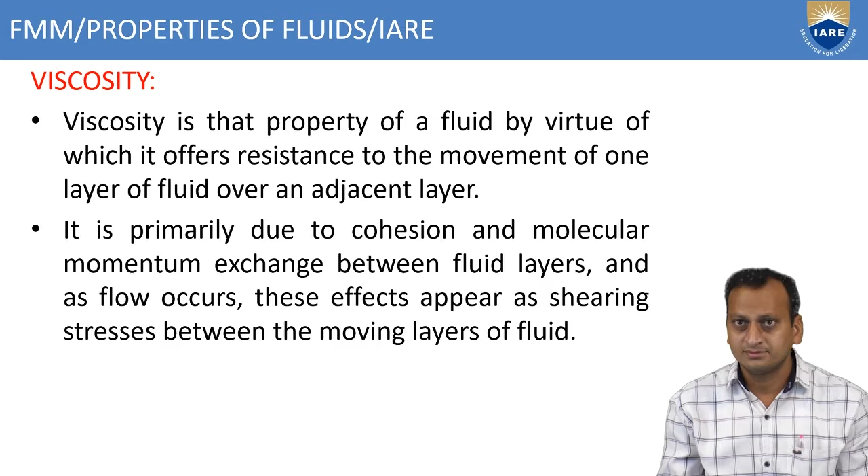Now we'll try to find out Newton's law of viscosity, otherwise the expression for viscosity. Here we are considering one stationary plate, and another one is a moving plate. The top plate is a moving plate with the application of external force, capital F.

Whenever the top plate is kept over the stationary plate, capital Y equals to zero, there will be no fluid movement. Otherwise, the fluid particles will stick to both plates, and there will be no flow occurring. So whenever there is a distance, whenever Y is moved away at a particular distance, then fluid flow will occur.

While fluid flow is taking place, if you consider a distance y, and the differential distance dy, the velocity at distance y is v. Corresponding to dy there will be a differential velocity dv. Similarly, at capital Y, the maximum distance, there will be maximum velocity, the terminal velocity.

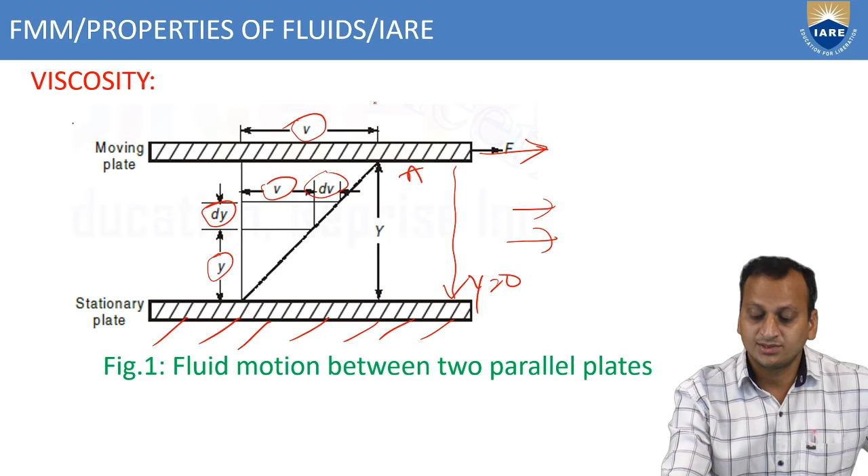Now whenever external force is applied, the fluid is moving. So experimentally the force application is given considering the area of the plate in contact with the fluid, the velocity, and the distance y.

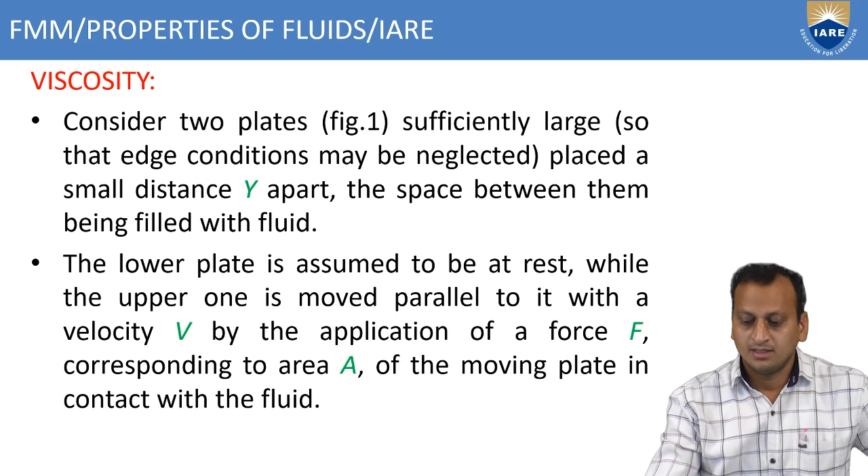So now consider two plates sufficiently large that edge conditions may be neglected, placed at a small distance y apart, the space between them being filled with fluid. The lower plate is assumed to be at rest, while the upper one is moved parallel to it with a velocity v, by the application of force F corresponding to area A of the moving plate in contact with the fluid.

So the particles of the fluid in contact with each plate will adhere to it, and if the distance y and velocity v are not too great, the velocity v at a distance y from the lower plate will vary uniformly from 0 at the lower plate, which is at rest, to capital V at the moving plate.

Experimentally, this is given as F proportional to area into velocity by distance. So the external force application is proportional to area into terminal velocity divided by the distance between the plates.

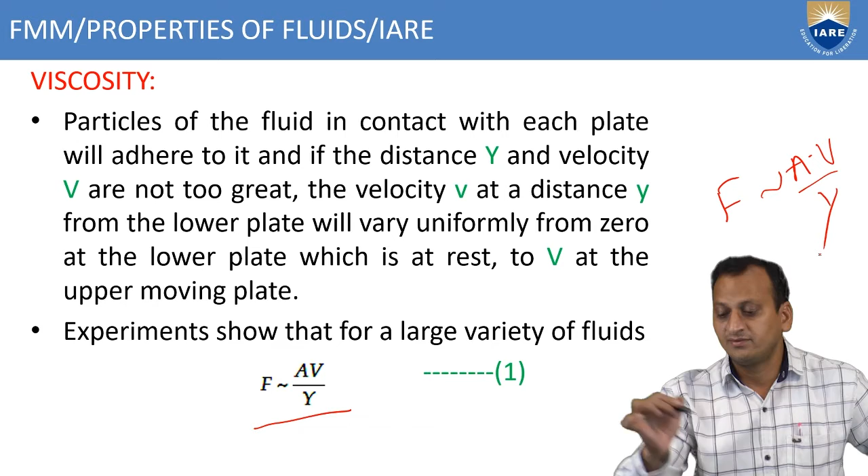Now it may be seen from the similar triangles in the figure that the ratio of V by Y, capital V by Y, can be replaced with the velocity gradient dV by dy. From the similar triangles we can write this expression, which is the rate of angular deformation of the fluid. This dV by dy can be called velocity gradient, rate of angular deformation, or shear strain.

If a constant of proportionality mu is introduced, the shear stress tau equal to F by A between any two thin sheets of fluid may be expressed as tau equals F by A. Since F is proportional to A times dV by dy, removing the proportionality gives F by A equals mu into dV by dy. Since F by A is known as tau, therefore tau equals mu into dV by dy.

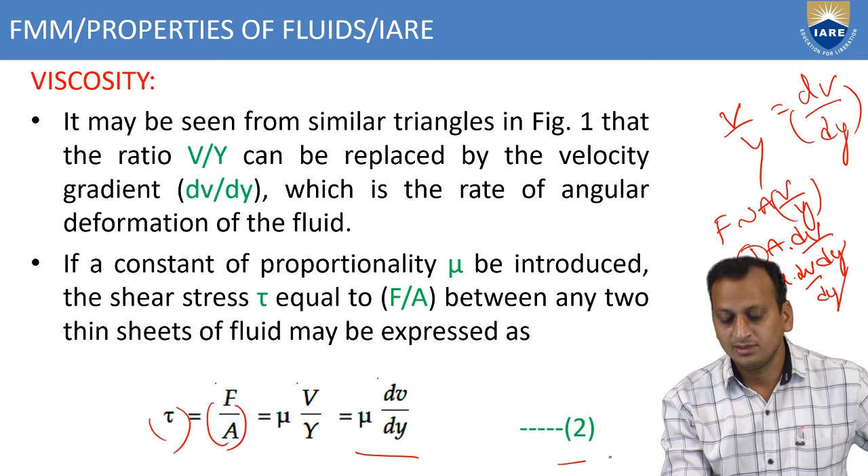This is the expression, and this is also known as Newton's law of viscosity, or Newton's equation of viscosity. In the transposed form, it serves to define the proportionality constant.

So equation 2 is tau equals mu dV by dy. In the transposed form, mu can be rewritten as mu equals tau by dV by dy, where mu is known as the coefficient of viscosity, dynamic viscosity, or simply viscosity. This can also be explained as the ratio of shear stress to the shear strain, or the ratio of shear stress to the rate of angular deformation, which defines the dynamic viscosity.

Basically tau equals mu into dV by dy, known as Newton's law of viscosity. In another form, mu can be written as tau by dV by dy, which is called coefficient of viscosity, dynamic viscosity, or simply viscosity of the fluid. Thus dynamic viscosity mu may be defined as the shear stress required to produce unit rate of angular deformation.

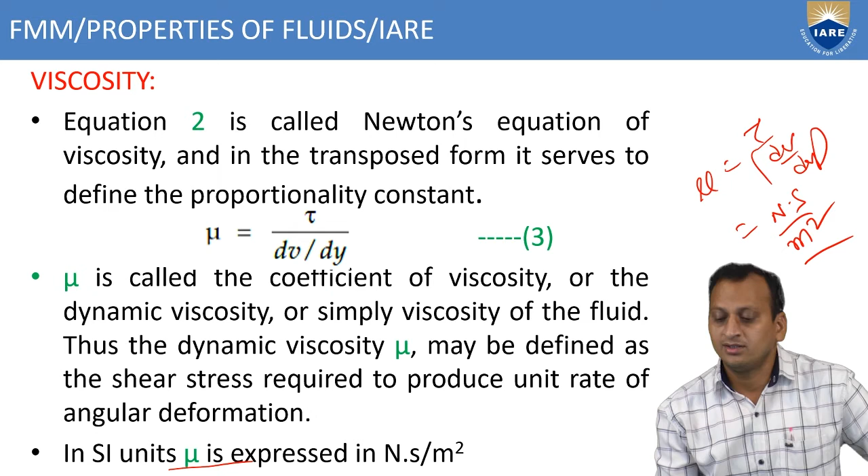See the unit of dynamic viscosity in SI units. Mu is tau by dV by dy. If you simplify this, you will find Newton second per meter square in SI units, where tau has units of Newton per meter square and dV by dy has units of inverse seconds. Therefore mu comes out as Newton second per meter square. We will see further units.

The SI unit of mu is Newton second per meter square, but in the metric gravitational system, mu can be expressed as kilogram force second per meter square. Similarly, in the metric absolute system, mu can be described as dyne second per centimeter square, or gram mass per centimeter second.

This unit is also called poise, after Poiseuille. The unit of dynamic viscosity is also expressed in terms of poises. The centipoise is 1/100th of a poise. In the English gravitational system, mu can be expressed as pound force second per feet square.

In the English absolute system, the same mu can be expressed as poundal second per foot square or pound per foot-second. So these are the four different units that can be remembered for solving problems related to dynamic viscosity, mu: poises, metric gravitational, metric absolute, English gravitational, and English absolute system.

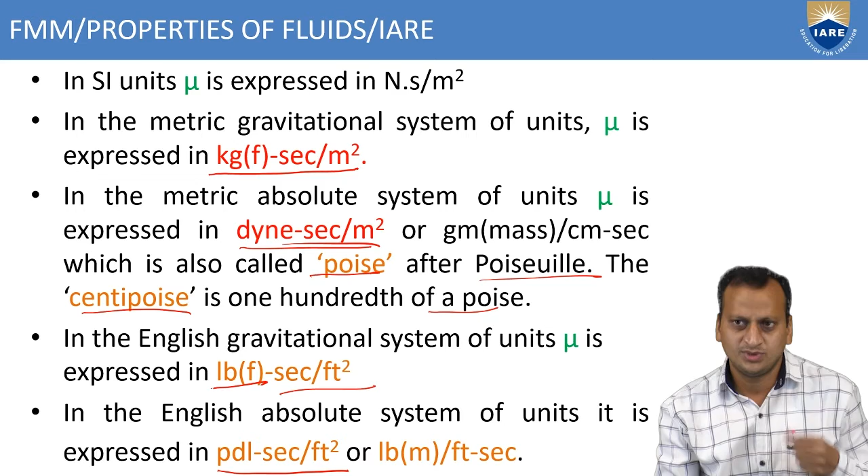Now, numerical conversion from one system to another is as follows: 1 Newton-second per meter square equals 0.102 kilogram-force-second per meter square, which equals 10 poises. We have to remember this for solving problems: 1 Newton-second per meter square equals 10 poises.

The ratio of the dynamic viscosity mu and the mass density rho is known as kinematic viscosity, denoted by nu. Nu equals mu by rho, where mu is dynamic viscosity and rho is mass density of a liquid.

In kinematic viscosity there is no force component, and the unit of nu is meter square per second. But in the case of dynamic viscosity, there is a force component. This is the difference between dynamic and kinematic viscosity: dynamic viscosity includes the force component, while kinematic viscosity does not consider force.

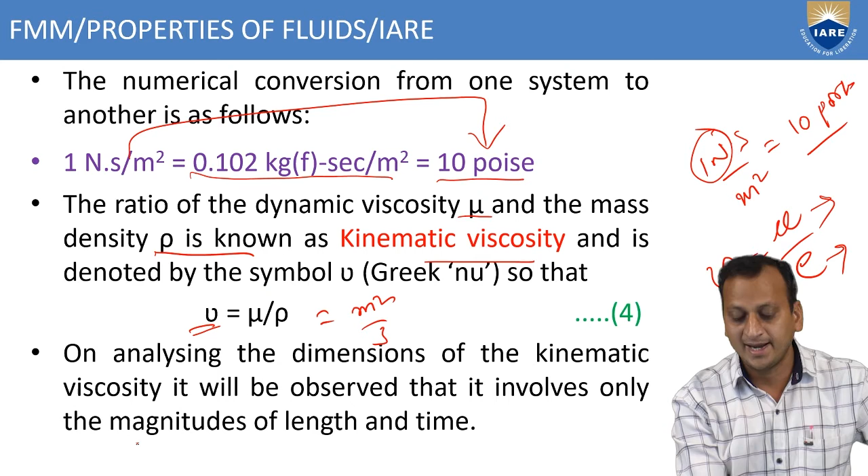On analyzing the dimensions of kinematic viscosity, it will be observed that it involves only the magnitudes of length and time, not force. So here we can see various units of kinematic viscosity, as we saw for dynamic viscosity.

For kinematic viscosity, the SI unit is meter square per second, but in the metric system, nu can be expressed as centimeter square per second or meter square per second. The unit centimeter square per second is termed a stoke, after G.G. Stokes, and its 100th part is called a centistoke. One stoke equals 1 centimeter square per second, which is 10 power minus 4 meter square per second.

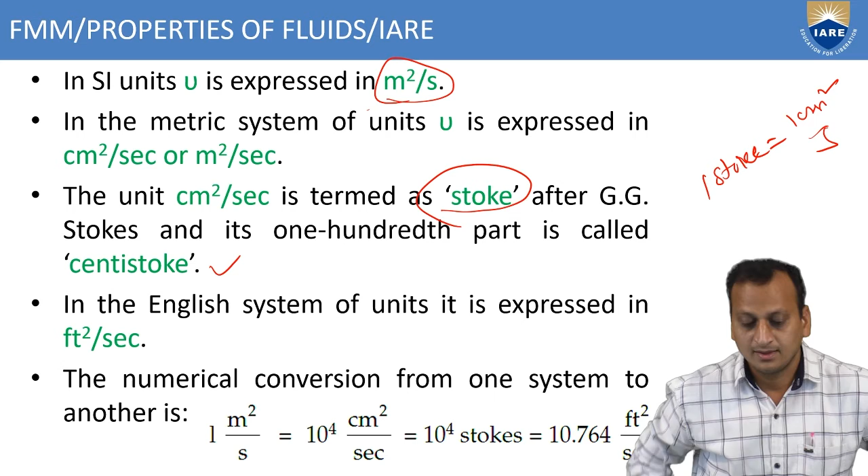In the English system of units, kinematic viscosity is expressed as feet square per second. For numerical conversion from one system to another: 1 meter square per second equals 10 power 4 centimeter square per second, which equals 10 power 4 stokes, and 10.764 feet square per second.

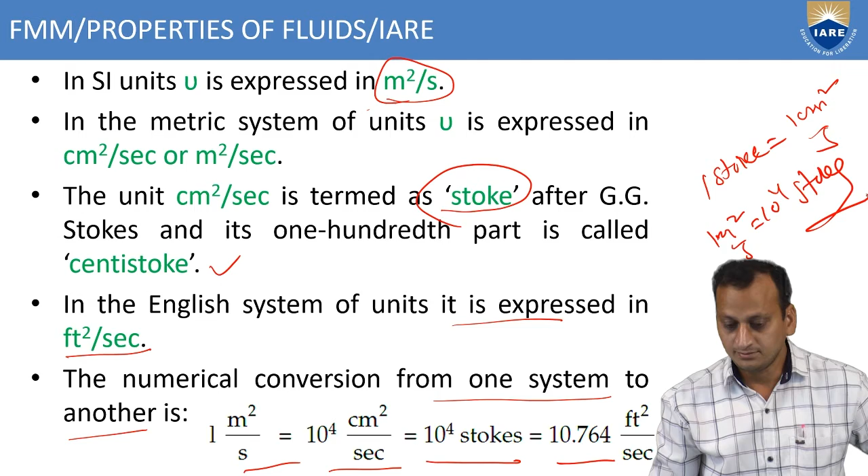The dynamic viscosity mu of either a liquid or a gas is practically independent of pressure for the range ordinarily encountered in practice. However, it varies widely with temperature. For gases, viscosity increases with increasing temperature, while for liquids, it decreases with increasing temperature. So the variation of viscosity for liquids and gases is quite opposite.

This is because in liquids the predominant forces are cohesive forces, while in gases the predominant forces are molecular momentum exchange between molecules. When temperature increases for liquids, these cohesive forces become weak, so the viscosity of the liquid decreases. In the case of gases, if temperature increases, the molecular momentum exchange between molecules increases, so the viscosity rises. That is the difference between liquids and gases.

So viscosity is a function of temperature, but independent of pressure. For liquids, the pressure is independent, and for gases, viscosity is a function of temperature only. This is because of their fundamentally different intermolecular characteristics. In liquids, viscosity is governed by the cohesive forces between molecules, whereas in gases, molecular activity plays the dominant role.

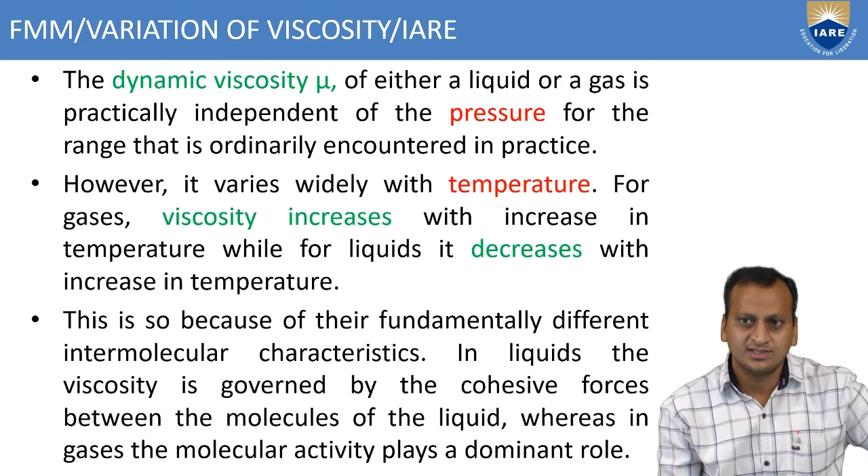The kinematic viscosity of liquids and of gases at a given pressure is essentially a function of temperature.

Now we'll discuss Newtonian and non-Newtonian fluids. After deriving Newton's law of viscosity, tau equals mu into dV by dy, this is Newton's law of viscosity. Based on this, we can describe the types of fluids.

If a certain fluid follows the equation tau equals mu into dV by dy, then it is called Newtonian fluid. If it doesn't obey, then it is non-Newtonian fluid. Common fluids such as air, water, glycerin, kerosene, etc. follow Newton's law of viscosity. There are certain fluids which do not follow Newton's law of viscosity. Accordingly, fluids may be classified as Newtonian and non-Newtonian fluids.

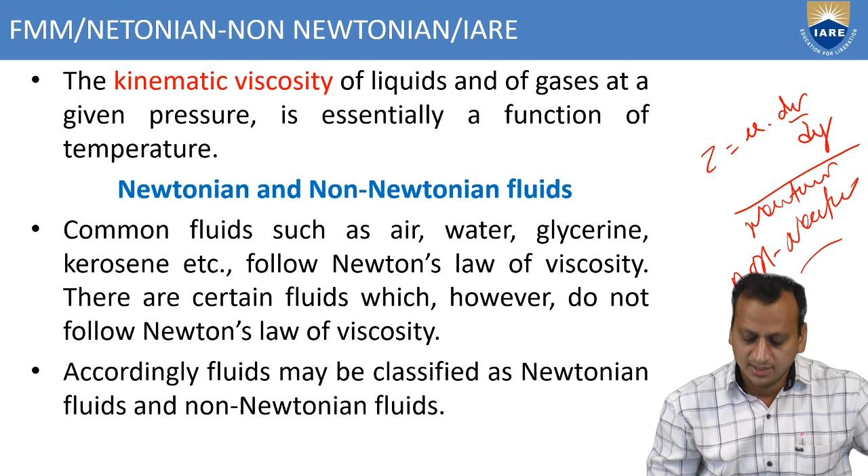Here we can see the graph between tau, shear stress, and the rate of angular deformation or shear strain or velocity gradient. For ideal fluid, tau is 0, so this is a perfectly horizontal x-axis. This is called ideal fluid, because where tau becomes 0, such type of fluid is known as ideal fluid.

Similarly, ideal solid means rate of angular deformation becomes 0, so dV by dy becomes 0. Therefore this is a perfectly vertical y-axis. That is the ideal solid line, and this is the ideal fluid line.

So if the relationship between tau and dV by dy is proportional, it is called Newtonian fluid, a linear relationship. This is a non-linear relationship, therefore it is known as non-Newtonian fluid. If tau versus dV by dy is linear, then it is Newtonian. You can understand this is curvilinear, not linear, therefore this is a non-Newtonian fluid.

Similarly, for plastic and thixotropic materials, initially a certain yield stress, an initial stress, is required. After that we can find out whether it follows Newton's law of viscosity or not. So after applying a certain initial stress, we can decide. Initially we applied this much stress, after that the plastic follows a linear relationship between dV by dy and tau. Whereas the thixotropic material, even after applying the initial stress, doesn't obey this.

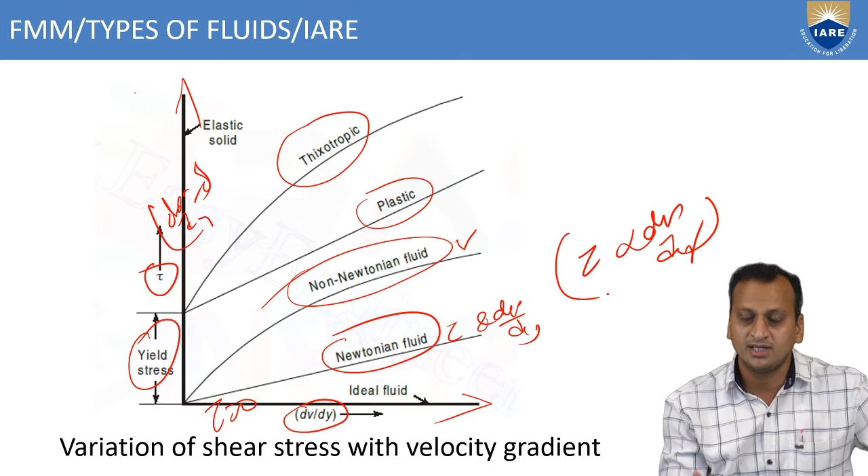Based on Newton's law of viscosity, we are distinguishing various fluids such as Newtonian, non-Newtonian, ideal solid, plastic, and thixotropic materials. For any fluid, if it follows tau equals mu into dV by dy, or tau directly proportional to dV by dy, then it is known as Newtonian, otherwise non-Newtonian. Based on Newton's law of viscosity only, we distinguish the fluids.

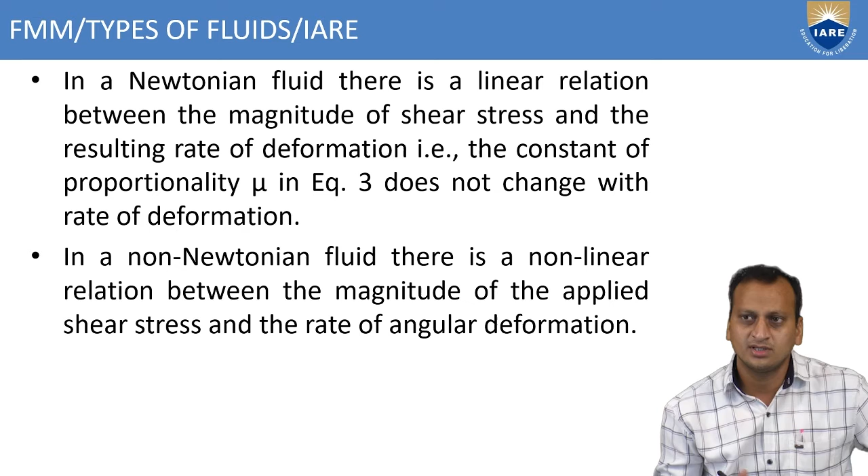In a Newtonian fluid, there is a linear relationship between the magnitude of shear stress and the resulting rate of deformation. The constant of proportionality mu does not change with the rate of deformation. In a non-Newtonian fluid, there is a non-linear relationship between the magnitude of applied shear stress and the rate of angular deformation. Now we will go through a problem.

A plate is at a distance of 0.025 mm, so the distance dy is given as 0.025 mm, that is 0.025 into 10 power minus 3 meters. From a fixed plate, it moves at 60 centimeters per second.

The velocity is given as change in velocity over change in distance, dy. 60 centimeters per second, that is 60 into 10 power minus 2 meters per second is the velocity, and it requires a force of 2 newtons per unit area, 2 newtons per meter square.

So this becomes tau, tau is 2 newtons per meter square. Force per unit area, that is shear stress described by tau, 2 newtons per meter square, to maintain the speed. So determine the fluid viscosity between the plates.

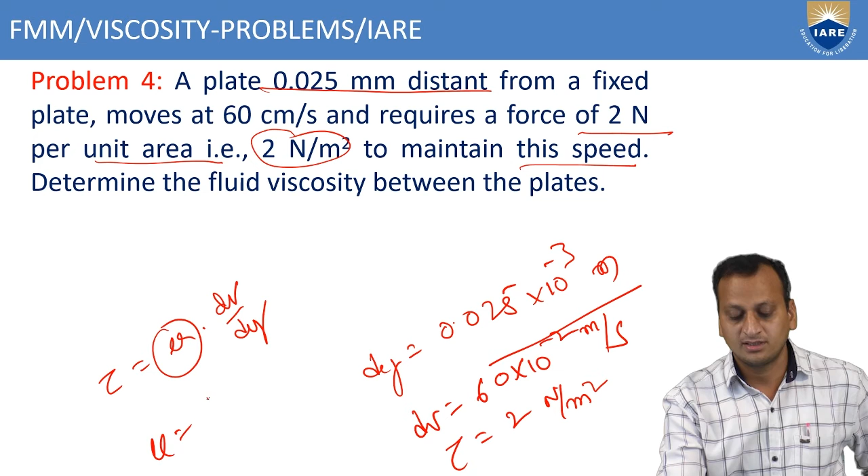We know tau equals Newton's law of viscosity, tau equals mu into dV by dy. So from this you have to determine mu. Mu is the unknown parameter, equal to tau divided by dV by dy. So this we have to calculate.

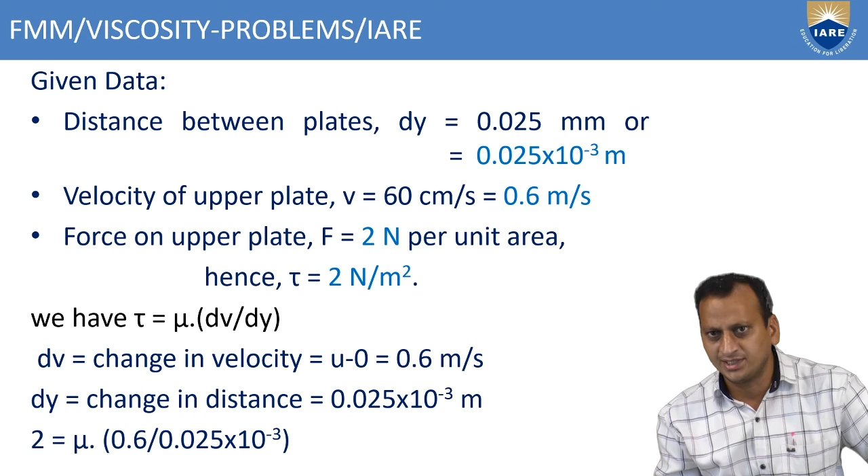So here we can see that explanation. Distance dy is given as 0.025 into 10 power minus 3 meters, and velocity is 0.6 meter per second, and tau is 2 Newton per meter square. So we have applied Newton's law of viscosity to calculate mu. All the numericals are substituted here. Mu can be determined as 8.33 into 10 power minus 5 Newton second per meter square.

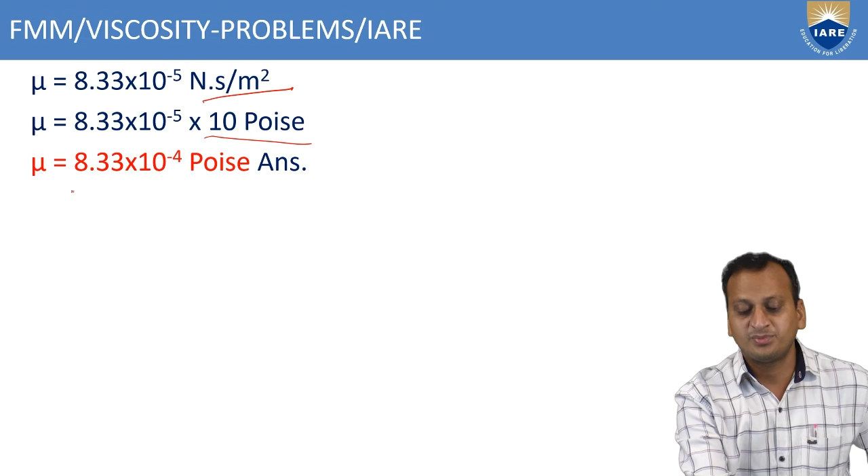So this is the unit. If you want to express it, since dynamic viscosity can be expressed in poise, you have to multiply by 10. 1 Newton second per meter square is equal to 10 poise. So if you multiply by 10, it becomes 8.33 into 10 power minus 4 poise. So this is the answer.

Now, at a certain point in castor oil, the shear stress is 0.216 Newton per meter square, and the velocity gradient is 0.216 second inverse. If the mass density of castor oil is 959.42 kg per meter cube, find the kinematic viscosity. So here the given parameters are: shear stress tau is 0.216 Newton per meter square, and velocity gradient dV by dy is 0.216 second inverse. This is the unit. The mass density is known as 959.42 kg per meter cube, find the kinematic viscosity nu.

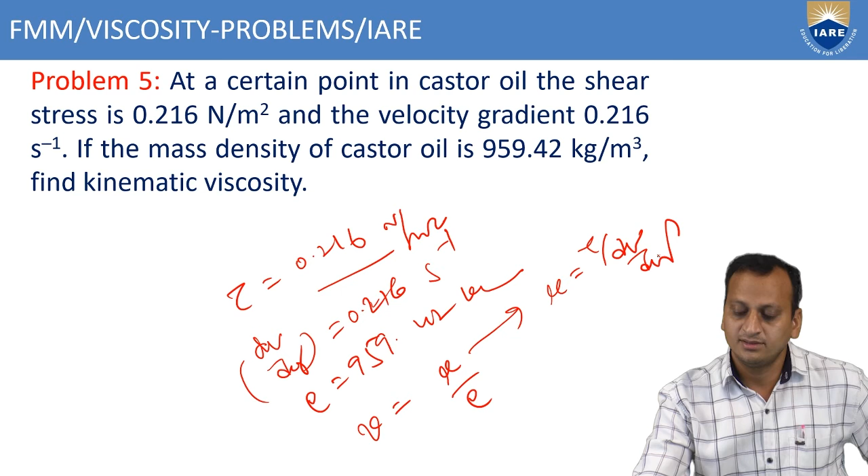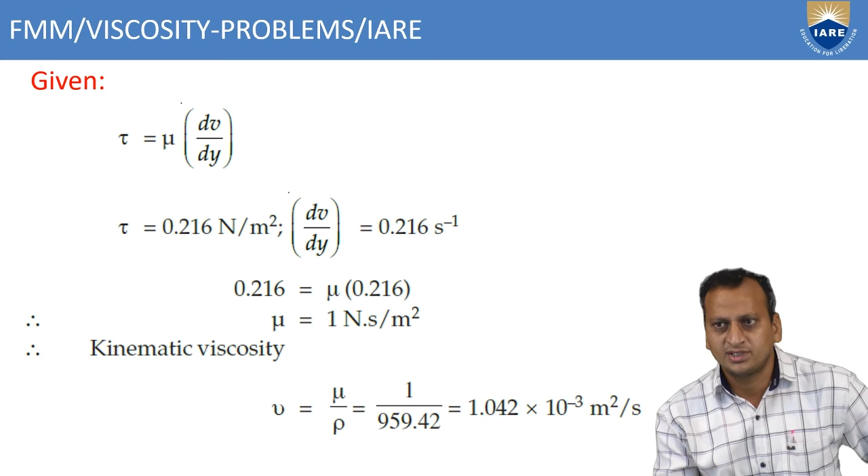Nu equals mu by rho, where rho is given. Mu only you have to calculate. How do you calculate mu? For calculating mu, we use Newton's law of viscosity: mu equals tau by dV by dy. How do you solve this problem? Tau equals mu into dV by dy, where mu can be calculated as 1, because both tau and dV by dy are 0.216. Now kinematic viscosity becomes mu by rho, so 1 by 959.42 gives you 1.042 into 10 power minus 3 meter square per second.

So next, another problem. If a certain liquid has viscosity 4.9 into 10 power minus 4 kilogram force second per meter square, and kinematic viscosity as 3.49 into 10 power minus 2 Stokes, what is its specific gravity?

So here you have to calculate specific gravity. The given parameter is dynamic viscosity. How do we find specific gravity? For calculating specific gravity, we need the densities. We know the density of water, but we should know the density of the fluid. Here a certain fluid is given, and its density should be calculated in order to find the specific gravity of the liquid.

So here the given parameters are mu equals 4.9 into 10 power minus 4 kilogram force second per meter square. This can be converted into Newton second per meter square also, by multiplying with 9.81. And kinematic viscosity nu is 3.49 into 10 power minus 2 Stokes. So 1 Stoke is 10 power minus 4, meaning 1 meter square per second is equal to 10 power 4 Stokes.

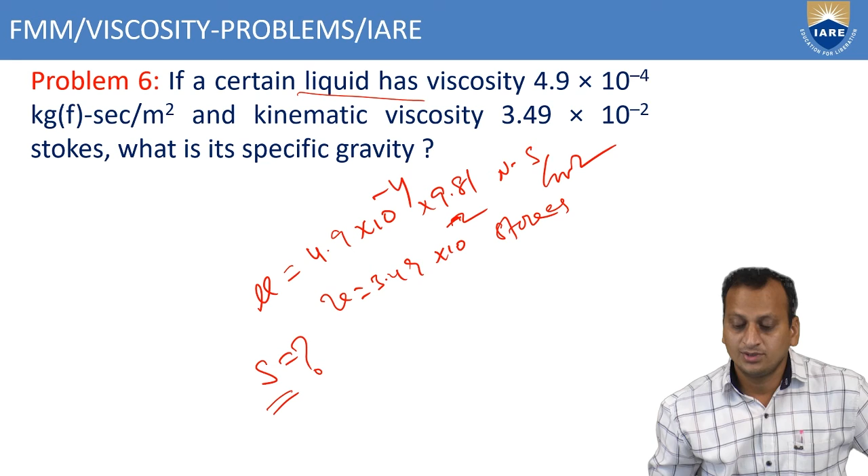So kinematic viscosity is 3.49 into 10 power minus 2 Stokes, and 1 Stoke is 10 power minus 4 meter square per second. Therefore the kinematic viscosity nu becomes 3.49 into 10 power minus 6 meter square per second, since 1 Stoke is 10 power minus 4 meter square per second. Therefore it becomes like this.

Now mu equals multiply with 9.81 in order to get it into Newton second per meter square, as this is in meter square per second, this is Newton second per meter square. Both are in SI units, so you have to convert them. Now nu equals mu by rho, or mass density rho equals mu by nu.

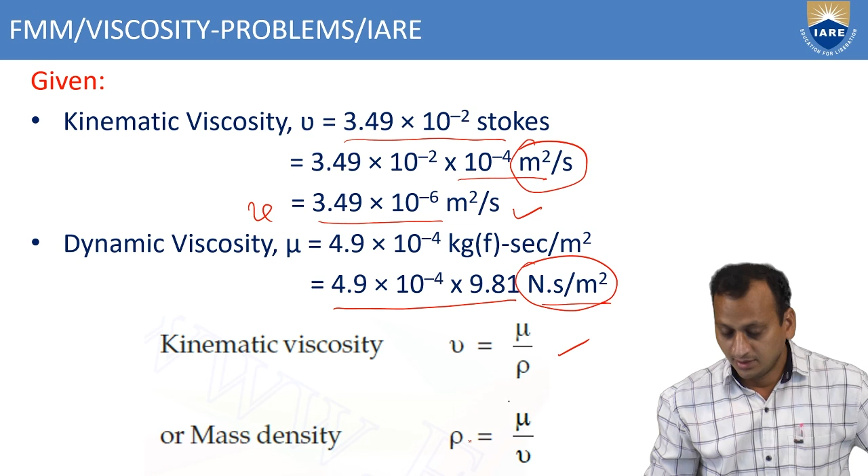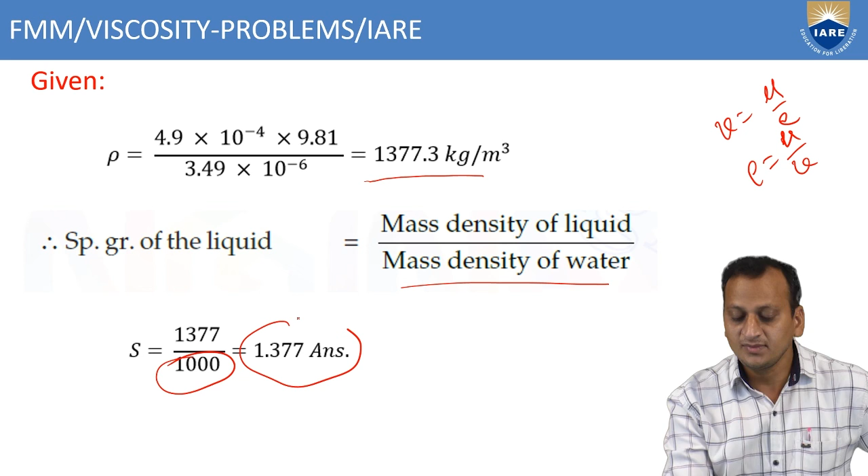So when the mass density of the liquid is known, then you can find the specific gravity. If you relate it for kinematic viscosity, nu equals mu by rho, where rho equals mu by nu, so you will get 1377.3 kg per meter cube. Specific gravity of the liquid becomes the mass density of liquid to the mass density of water. This is 1000, we know this is 1000, and this mass density we have calculated from this expression, that is 1377. Therefore 1.377 is the specific gravity of that particular fluid.